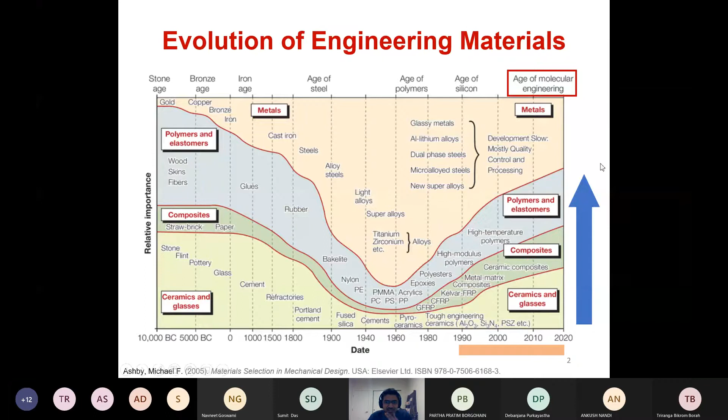So I'll show you how I basically touch upon, or how I'm able to leverage the molecular structure, or tailor and study the molecular structure to see how a particular type of polymer, ceramic, or composite behaves.

In general, the center of gravity, or the centroid of my research, is mechanics of materials. So I look at different types of materials and study the mechanics of those materials. I've done a bunch of fiber composite processing and characterization during my PhD.

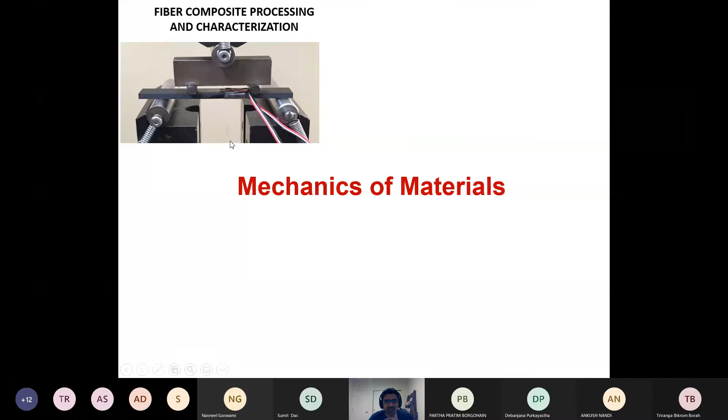I basically looked at out-of-plane impact on fiber composites, and that was something I spent over 4 years working on. The project that kind of got me excited to work in composites was bio-inspired composites.

You can actually see here, there's an actuating composite that can change its shape and stiffness depending upon how much internal pressure you're putting into the composite. I've also worked on polymer-derived ceramics.

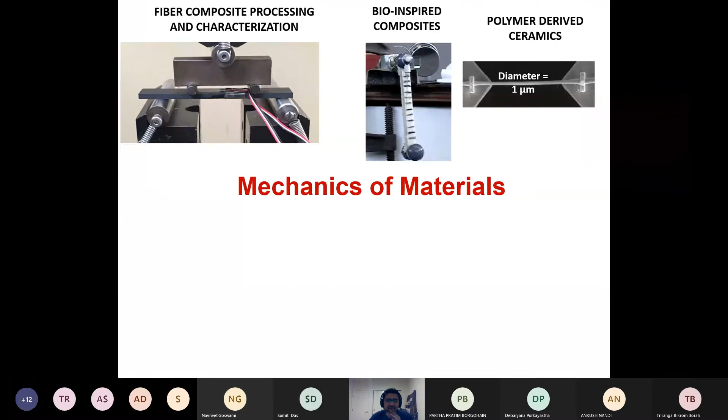These are basically polymers that you cook at really high temperature and they turn into ceramics. And they have a very interesting behavior: the smaller they get, the stronger they get.

Another area of interest for me is additive manufacturing of thermosets and ceramics, mainly doing some sort of free-form additive manufacturing of thermosets.

Rapid manufacturing is something that I'll talk about today—how we use radio frequency waves to rapidly heat and cure thermosets or composites. And finally, reactive molecular dynamics, where we are able to look at the molecular characteristics using simulations.

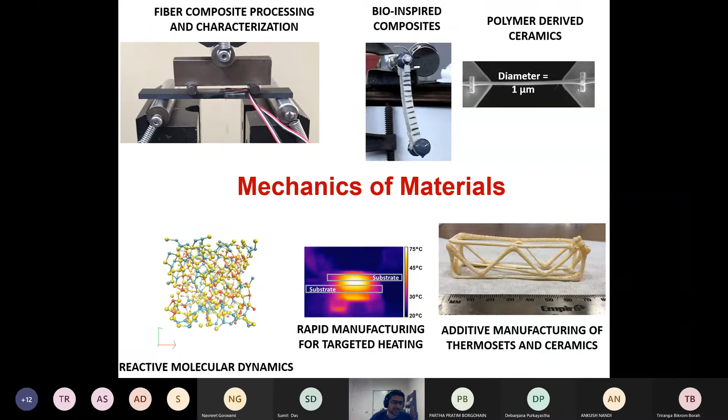To explain my area of expertise or skill set, I think this is a really nice diagram which captures everything. I do simulations, experiments, and modeling, closely knit with my areas of interest: lightweight composites, molecular dynamics, and smart or rapid manufacturing. Overall, my focus is to couple experiments and simulations to understand the mechanics of a particular material. I'll touch upon one project from each of these areas.

I'll start with reactive molecular dynamics, then go to lightweight composites, and then talk about rapid manufacturing.

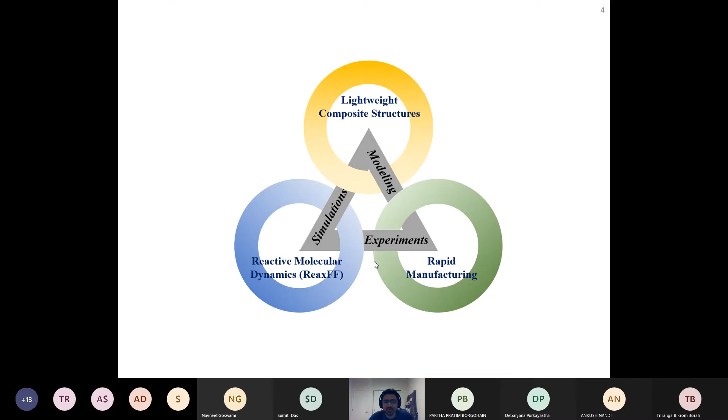So, reactive molecular dynamics, or ReaxFF - I was really fortunate to work with one of the co-inventors of this method, who was my PhD co-advisor. Atomic simulations are really good because they provide nice insights into the performance of different fillers or polymer matrices or whatever material you're trying to use. If you have a wealth of materials, hundreds of them, and need to narrow down to 4 or 5, this is an excellent way to do that.

The framework I developed is called accelerated ReaxFF. The motivation was that we found papers showing epoxy is made up of two parts: a curing agent and an epoxide molecule. When these two molecules come together, they make the epoxy - your airplane parts are made of thermosetting epoxies. What happens is these reactive sites, the NH2 and the epoxide, react with each other and cross-link.

Up until now, the way people run these simulations is they say that once these two sites are within a certain distance from each other, the molecules basically cross-link. So they say if this NH2 and this epoxide are within 10 angstroms of each other, they cross-link with each other. Well, that's not exactly true. The way a reaction actually works is the molecules come together.

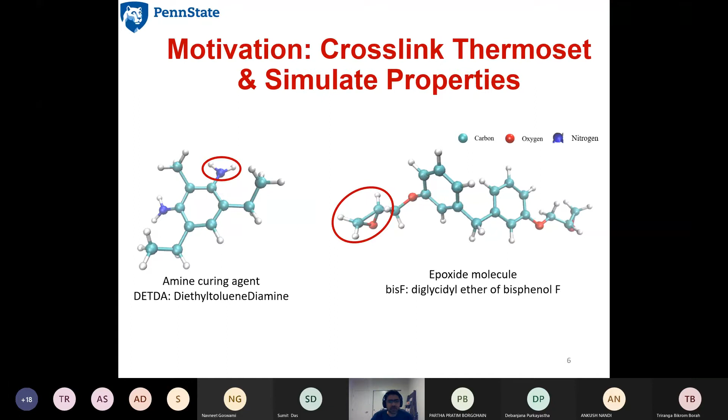There's a pathway to the reaction. So what we did, we call it accelerated ReaxFF, or accelerated reactive molecular dynamics simulations. We say the first step is that the distance criteria needs to be fulfilled - the amine and the epoxide need to be within a certain distance from each other. But after that, we give these molecules a push to go over the transition state. If you look at the reaction coordinates, your reactants are here, and you give your reactants a little bit of energy - the way it happens is like you put your epoxy in an oven, you heat it.

When you take it out, it's cured. So when you heat your epoxy, you're giving this extra energy to go over the transition state and make products. We do exactly the same in simulations - we give them a little bit of extra energy to reach the transition state, and then it's completely up to the molecule whether it tumbles back down to the reactants or goes on to make a product.

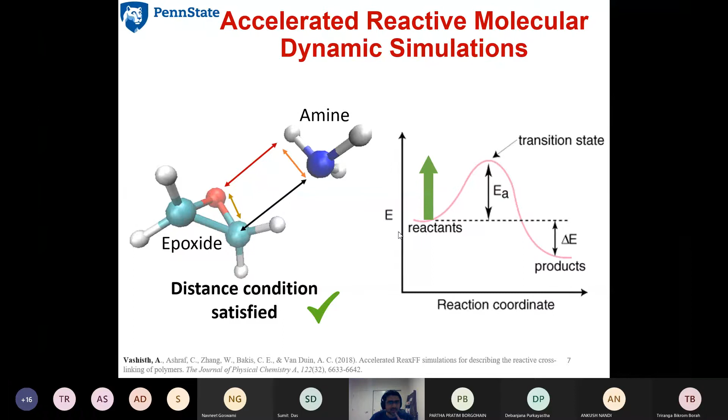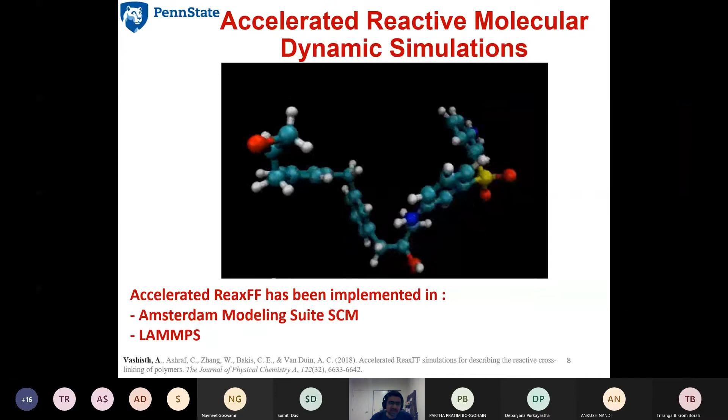So basically, when these two criteria are fulfilled and there's a nice pathway, we get a reaction. This is how the reaction looks - the distance criteria is fulfilled, there's a good pathway, and the energy we gave it was good enough for it to react, and the two molecules react with each other. The beauty of accelerated ReaxFF is that it weeds out all the unwanted reactions - there might be cases where the epoxide and amine are in a weird orientation and wouldn't actually react. In that case, you would never get a reaction with this method.

So why is it useful? Let's say you have a bunch of epoxides and amines, and you need to figure out that you need a modulus of 4 GPa or something, and you have thousands of epoxides and amines. How do you figure out which one would give you a particular modulus, a particular range of temperature where these epoxides can work? That's where simulations are really powerful. You can find the modulus, the TG, coefficient of thermal expansion, density, atomic oxygen impact - you can do all that with simulations.

For example, if you want to look at what type of epoxy coating might be good for a low Earth orbit satellite, and you want to study the atomic oxygen impact on different types of epoxies, and figure out if a linear molecular chain would be nice or a cycloaliphatic type of chain would be nice - what should be the molecular structure of your polymer that you put on a satellite. This is a really powerful tool.

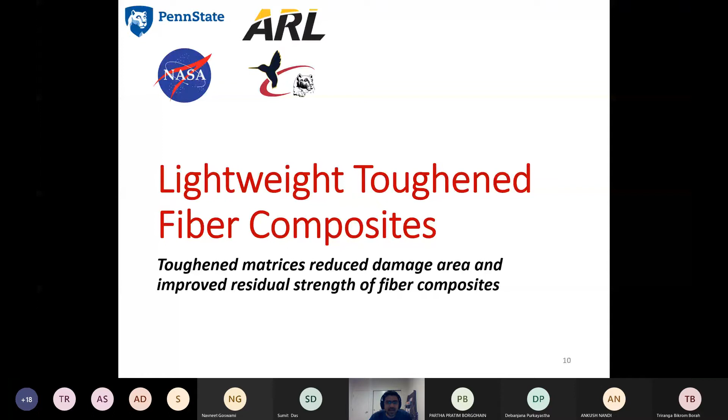So moving on, I'll talk next about lightweight toughened fiber composites. The motivation here - this work was basically done in collaboration with NASA and the Army Research Lab here at Penn State, where I was pursuing my PhD.

The motivation was that helicopters have these drive shafts. They basically transmit the torque from the engine to the rotors. That's how your rotors rotate and your helicopter flies.

And these drive shafts are kind of like the Achilles heel of the helicopter. So if there's an out-of-plane impact, if somebody shoots at these drive shafts, they can basically rupture completely, and the helicopter would be a dead weight and drop down.

At the same time, there is a need to make these materials ballistically tolerant, but at the same time, you need to make these structures very light as well. So you need to transition from metals to fiber composites, but you need to be aware that when you make these fiber composite drive shafts, they need to be ballistically tolerant.

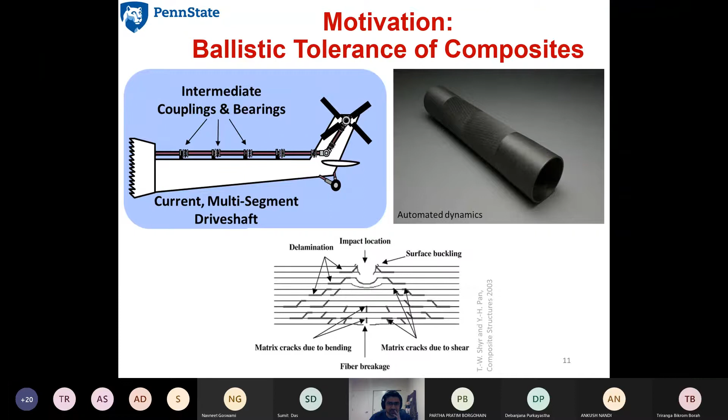So the type of damage that you have in these composites is delamination, some fiber breakage, micro cracking, matrix cracking. Our thought was to improve the matrix performance in order to improve the impact tolerance of the material. So this is what we did - we thought that we'll add nanofillers to the matrix.

Any fiber composite has two parts - you're looking at the cross section here. There's the carbon fiber and there's matrix. The matrix could be a thermosetting polymer or a thermoplastic polymer. We were specifically interested in thermosets.

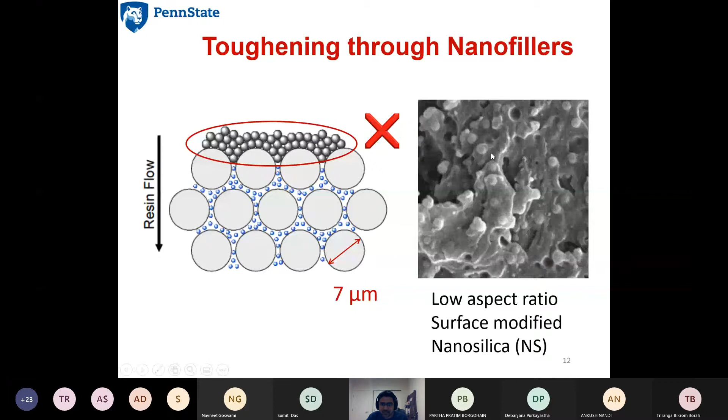So we wanted a nanofiller that can actually get between the carbon fibers. It does not agglomerate, it stays well dispersed, and it's easy to make. So we actually went with low aspect ratio nanosilica particles. These particles had a diameter of 142 nanometers - really, really small particles. You can actually see these particles here on the right, with a size of 142 nanometers.

So how do these nanoparticles improve the toughness of the material? There are two ways. Basically, to improve the toughness of the material, the crack should dissipate more energy. The first method that the nanosilica particles employ is called crack deflection. Instead of the crack traveling in a straight line, it actually deflects a lot. So instead of traveling a length of L, since it's wavy, the final length ends up being longer than L. So you're able to dissipate more energy.

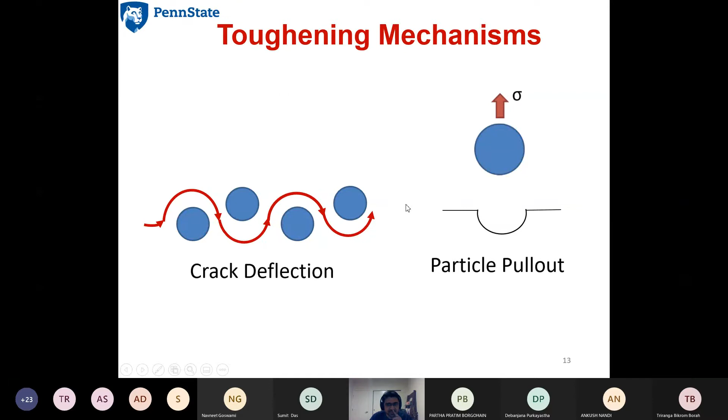The other method is particle pullout. Here again, since the particle is not able to travel in a straight line, and there's energy dissipating in pulling out this particle from the matrix, there's more energy dissipated as the fracture propagates or the crack propagates.

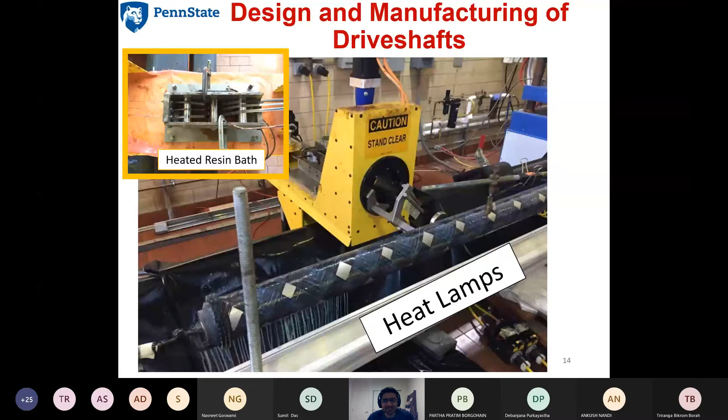And I had to come up with different ways to heat up the bath. This was really interesting, really challenging. It took me almost 3 to 4 months to figure out the setup. But as I said earlier, I was able to use my Indian skills of jugaad to come up with this whole setup. So here is how the testing procedure looked like.

We had these small helicopter drive shafts that I made. We did normal ballistic impact, which means a bullet went through the diameter of the tubes. This testing was done at NASA.

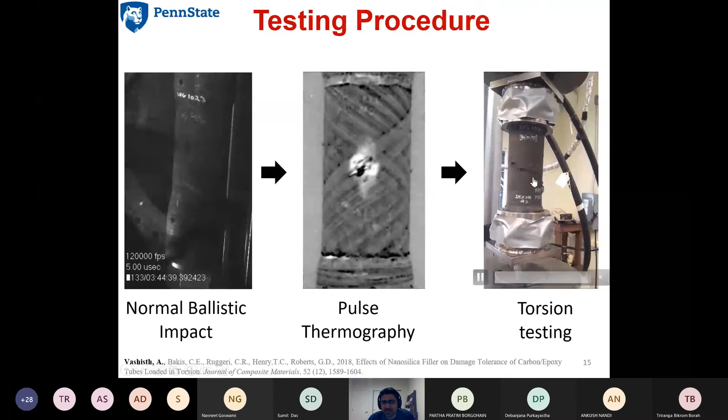Then we did pulse thermography to look at the damage in the tubes. This part of the work was done at the Army Research Lab, and the torsion testing of these impacted tubes was carried out at Penn State.

What we found was that two concentrations that worked best for our systems were 25 and 15 weight percent of nanosilica in this particular curing agent called DDS. It was really good because DDS is the type of material that's used in thermosets also. It gives a really high Tg, or glass transition temperature, which is the temperature where a material transitions from glassy to a rubbery state. So this turned out to be really good, that DDS resin showed the best performance.

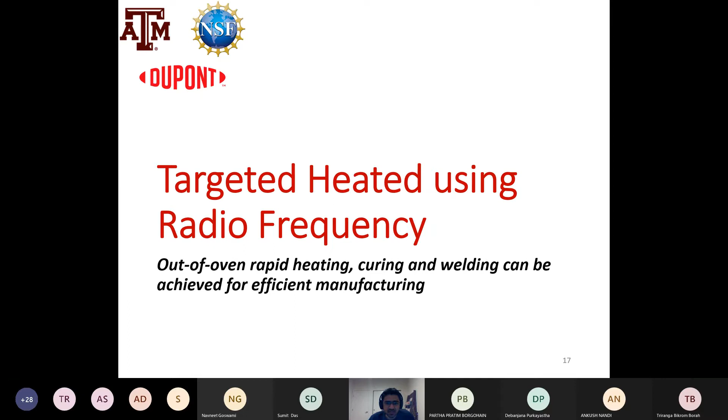Finally, I'll talk a little bit about targeted heating using radio frequency. This is a very interesting method for rapid manufacturing, out-of-oven rapid manufacturing of composites. The main idea is that you take capacitor electrodes and input a radio frequency or RF power into them. RF is basically the same wavelengths that your phone works at. We usually work around 1 to 100 megahertz of frequency.

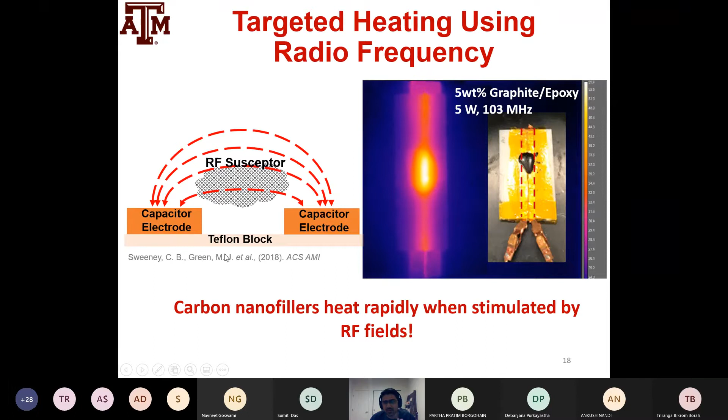So this was a very, very interesting discovery made in the Green Lab in 2018. That's pretty much when I just entered the lab as a postdoc, and started to brainstorm where else we can apply this technology.

One of the projects I worked on, our thought was to make continuous manufacturing of prepregs using radio frequency waves. Prepregs are the materials used for making aerospace composites. When you make an airplane wing, you don't actually dip the carbon fiber in epoxy and put it on an aerospace tool at the actual facility.

The dipping of carbon fiber and the partial curing is already done in a previous facility. When you make an airplane, you take these prepregs, stack them up, consolidate and cook them - that's basically what Boeing does. Before that, a company like Toray makes these prepregs by taking carbon fibers, dipping them in a matrix, and heating them in a large oven.

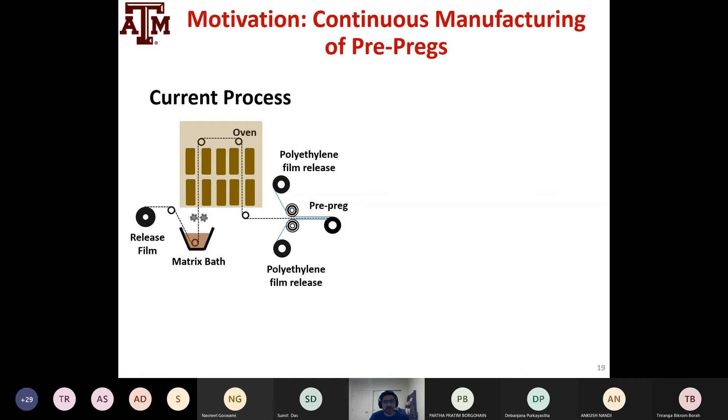Thermosets, when they start curing, begin at 0% cross-linking. Once they achieve 30 to 40% cross-linking in the oven, they're not exactly bagged but trapped between polyethylene films. These films are later released, and you have the prepreg, which you lay up to make a composite.

So we propose that instead of heating these carbon fiber composites in really large ovens, which are very expensive to operate, we'll heat them using RF field applicators - much smaller applicators. It's a very easy, much less energy-intensive, out-of-oven method for making prepregs for continuous manufacturing.

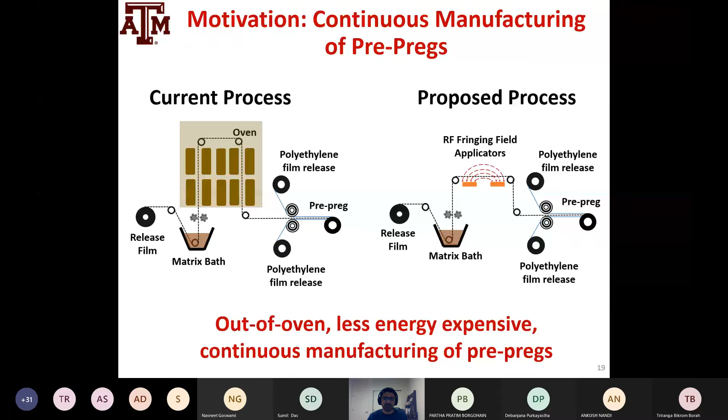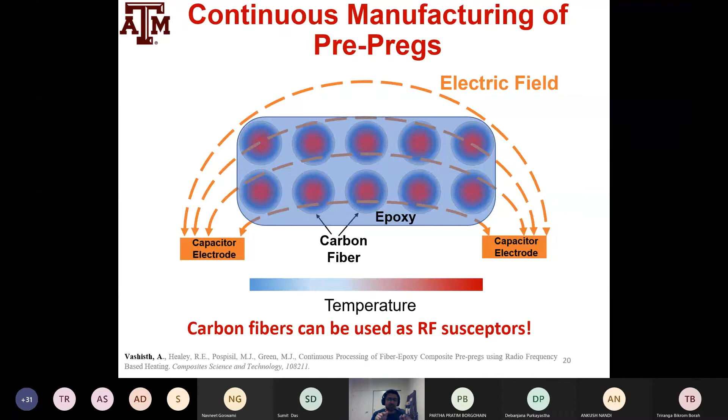This is how it would work, or we figured out it would work: if you have this composite, you pass fields through it, and the carbon fibers start heating. It's more or less a volumetric heating mechanism, where the whole volume or cross-section of the composite heats up rapidly.

What we saw was that just by varying the amount of input power, you can get up to 250 degrees Celsius within 2 minutes. This was really, really fast - rapid curing for epoxies. This was really promising, and it's something my lab plans to pursue in the future as well.

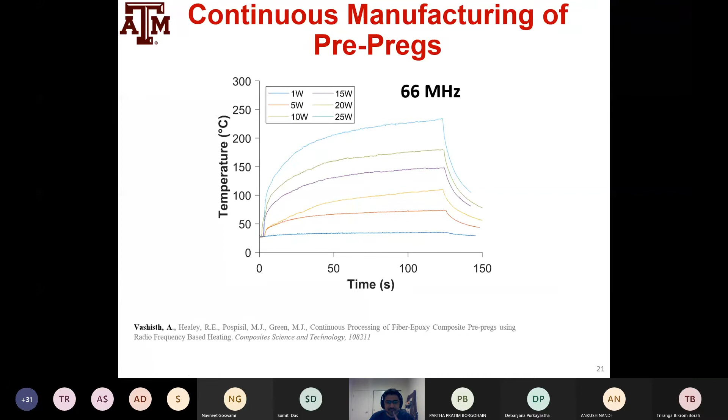So I think I'll leave it there. I gave you a bit of a taste of reactive molecular dynamics, toughened composites, and advanced manufacturing. If you think about it, the plan of my lab is to work at these different scales - from molecular dynamics to actual structural composites - and understand what we can extract from each scale, and how each scale helps us understand the physics of the material.

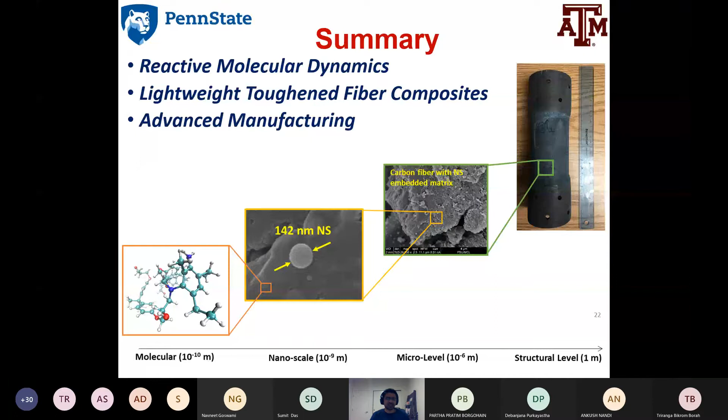There are some other research projects I've been working on. I'll give you a quick 20-second elevator pitch for each of these other projects.

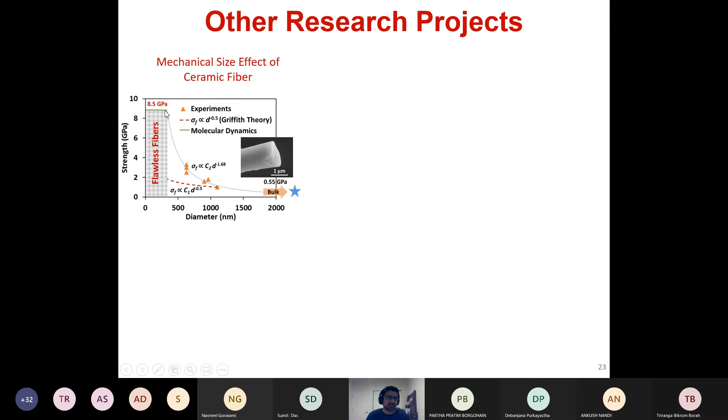One of them is the mechanical size effect of ceramic fibers. Griffith theory says the strength of a material is inversely proportional to the square root of the size of the flaw that material has. We actually started making really small ceramic nanofibers, and found that they don't follow Griffith theory. Their strength increases rapidly as you decrease the size, until there's a point where they have no flaw in them, becoming flawless fibers that reach the limit strength of the material itself. This is a very interesting project.

I worked on stability of MXene, something I'm still working on with some collaborators. MXene is a new type of nanomaterial, just like graphene, with layers of metal and carbon or nitrogen sandwiched between each other. It's a very interesting, very novel, and rapidly growing material in the research community.

Another area I've been working on is called laser-induced graphene. It's a very interesting material - you basically shoot a laser on a polymer, and you make graphene. It's a one-step process to make graphene. Some people don't think it's actually graphene, and I also doubt if it's exactly graphene, but it's a very interesting material.

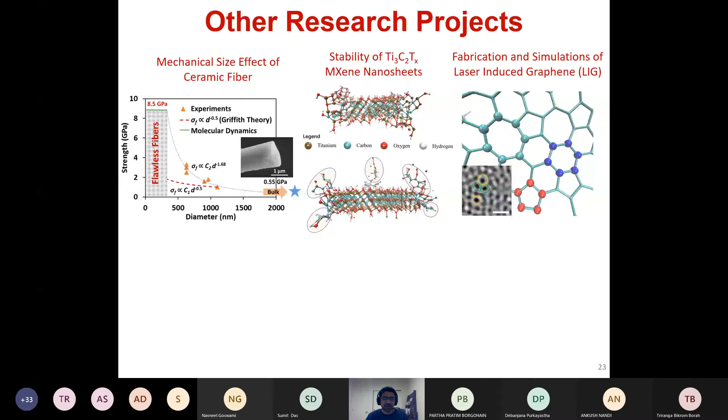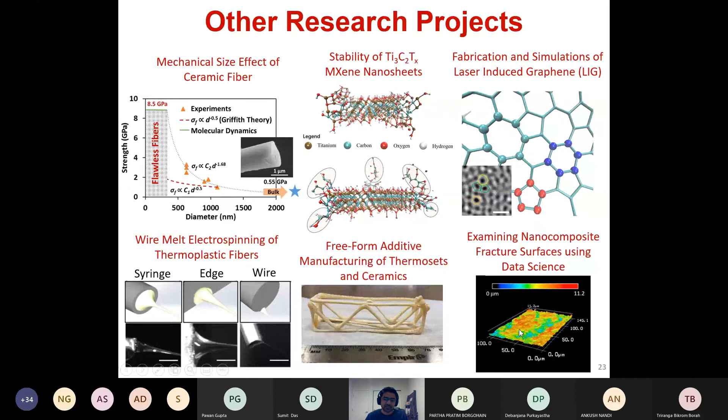Another method I've been working on is wire melt electrospinning of thermoplastics. I mentioned earlier that I've been working on freeform additive manufacturing of thermosets and ceramics, and some work on fracture surfaces of nanocomposites, trying to understand the toughening mechanisms in nanocomposite fracture surfaces using nanomechanics and data science along with experiments. So that's pretty much it. Thank you so much for your patience, and I'll be more than happy to answer any questions that you have.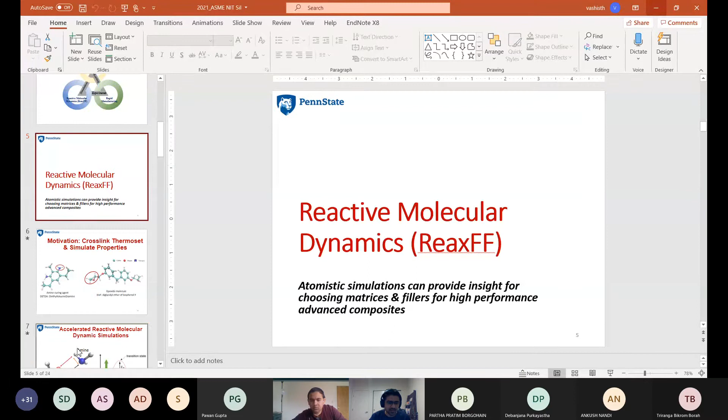it assumes a continuous curve for the bond order. It doesn't say that the bond order is 1, 2, 3, or 4 - there's a continuous curve for it. So basically, you're able to get the transition state, and you're able to see the reactions of different types of reactive events. It's really good for low activation energy, or when this EA value is very low.

For example, when you're looking at explosion of RDX, or conversion of polymer to graphene, it's really good for those type of events. But it becomes really challenging when the EA, or activation energy, becomes really large - for example, 40 kcal per mole. So that was the motivation for coming up with accelerated ReaxFF, because there we are inputting extra energy just in the reactive sites. I don't know if that exactly answers your question or not.

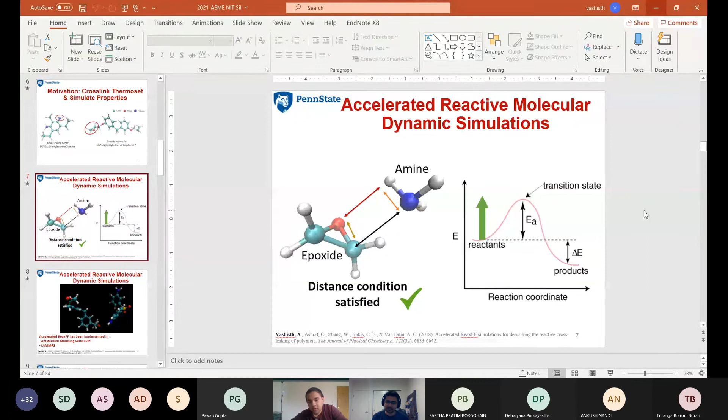Yeah, and adding a side question to that - since we are trying to investigate interactions among polymer chains, is it possible to predict some mechanics aspects like stress strain curves, continuum scale things?

Yeah, exactly, that's exactly what we did here. I just had the animation here, but we did calculate the modulus of the polymer as a function of strain rate. Polymers' performance is dependent on the strain rate of the materials, so we looked at different strain rates and tried to figure out how the polymer reacts to varying strain rate. So yeah, you can actually get stress strain curves for polymers.

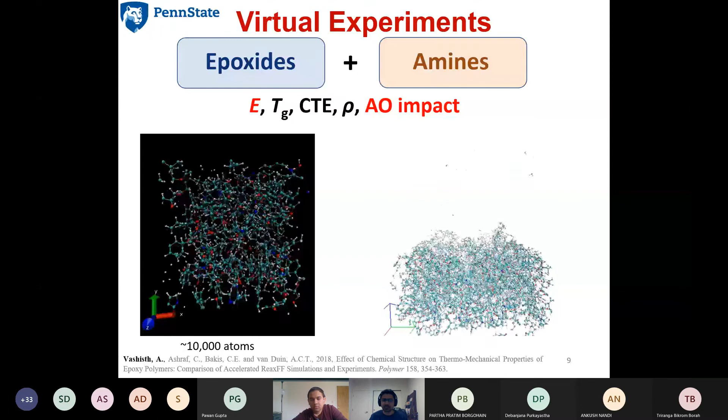It depends on how well your force field is trained. The material properties for these atoms and angles is called the force field - just like you put material properties in finite element, in molecular dynamics it's called force field. Those force fields are generally trained using first principle calculations or DFT methods, so you need to make sure that when you train those force fields, it can capture the modulus, or the stress strain behavior of the material as well.

Okay, and so I was really excited by the scale bridging thing that you showed, going from a nanoscale to a continuum scale or macro scale.

So a question in this regard is that a polymer at a nanoscale may behave very differently from that at the bulk level. How is that being taken care of? That was one of my questions that I'm very curious to know about. That's really good, because that's one of the questions for my research lab also.

That's something we are trying to look at in my lab as well, especially for the work that I did. In general, I had some inputs from molecular scale and bulk data, and I tried to correlate them. Then I had some micromechanical models, and I tried to correlate them with the lamina level properties I measured for carbon fiber epoxy composites.

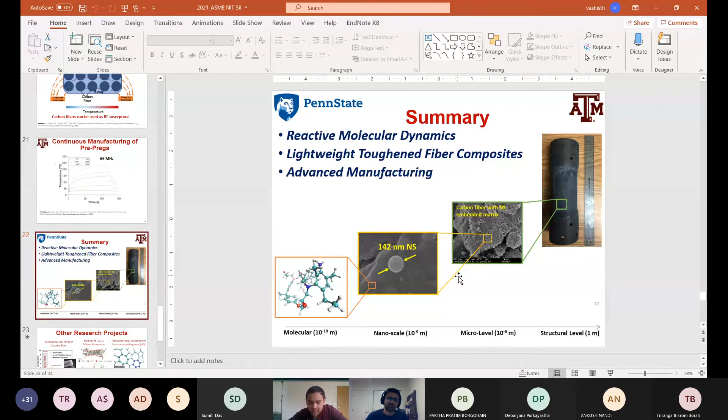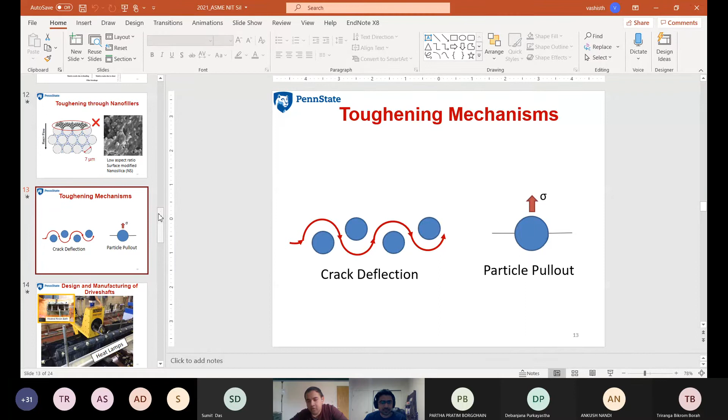One last question. In slide 13, for the toughened composite work, you showed these two prevalent mechanisms, crack deflection and particle pullout. So how did you cement that these were the dominant mechanisms? Did you complement this with some simulations, visualizations, or experimental validation for that?

I guess, maybe I missed this, but I had multiple SEM images for this. You can actually see particles being pulled out, remaining on this side of the surface. So particle pullout is something you see very easily. Crack deflection we also saw on some other SEM images, but the main mechanism we saw was particle pullout - you can see particles sticking out or making craters on the epoxy a lot.

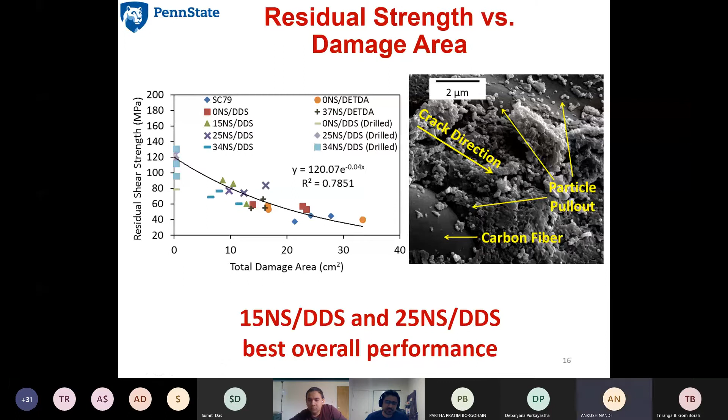So yeah, we used SEM to do that. Another thing I'm doing right now - I have a graduate student working on this. He's using a combination of nanomechanics, data science, and experiments to figure out how much of each mechanism happens, like how much particle pullout you have and how much crack deflection you have. So that's also very interesting.

Thank you so much. Yeah, no worries. Thanks. Any more questions?

Sir, a very good evening to you, sir. This is Danish Khandekar from second year mechanical engineering. Sir, hello, sir. Your presentation was really interesting, and it got me very much intrigued. So sir, my question is rather a broad-based question.

I just wanted to ask how long will it take - you are in the US doing research and developing all these technologies - but I just wanted to ask how long will it take India to indigenously develop all these technologies? Because I have seen the application of all these composites in various aircrafts, specifically the huge aircrafts the US Air Force used to make. I think every place has its own strength.

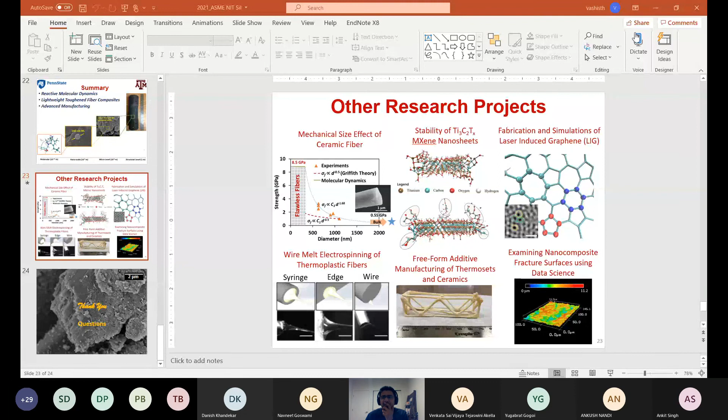Well, this has been really nice, I really appreciate it. I think the type of questions you guys ask, I don't think as a second year, third year, or even fourth year student I would have been able to ask those questions. I was probably busy playing football and cricket at that time. So really nice, it's a very very good initiative by ASME NIT Silchar that you have these type of talks. I think this is excellent, maybe the silver lining in this Corona era. But this is really nice, really good that you have these type of talks, and you're able to learn so much about so many different types of things not covered by the curriculum, but you get this type of exposure. So this is excellent, that's really nice.